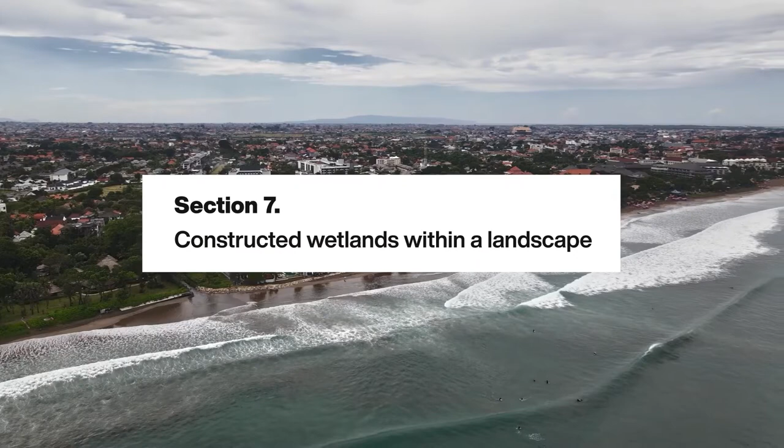So, where did we stop yesterday? Methods of wastewater collection. The first one is conventional, the second is the correct one.

Well done, Betsy. That's the best way to say it. Thank you, Professor. Now please come out to the board and tell me what that means.

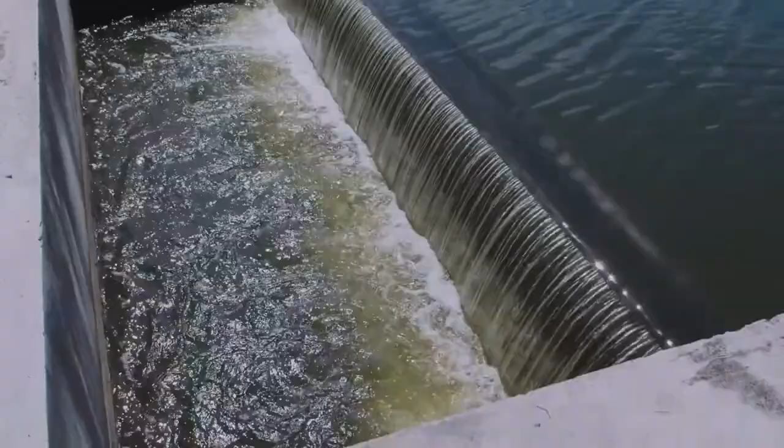With pleasure, Professor Higgins. The conventional method of wastewater collection dates back to ancient times, when wastewater was not cleaned or treated. Wastewater was just discharged and forgotten. This practice is still common today, where wastewater naturally flows downslope, ending up in the first body of water it runs into. It is interesting to note that today the types of wastewater, regardless of their principles of formation, are not the same as they were centuries ago.

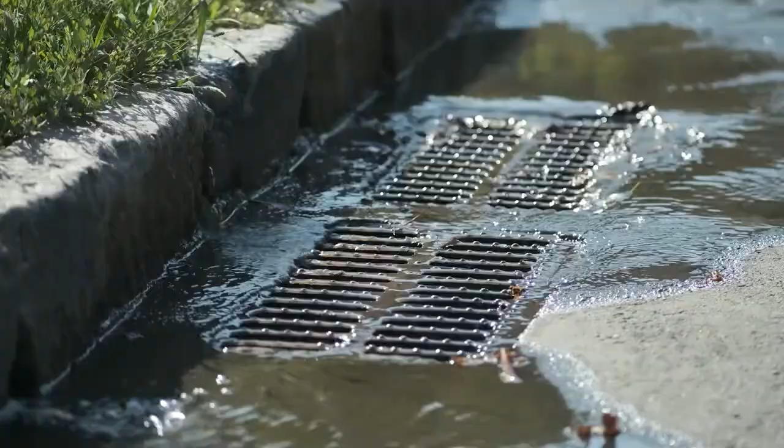Let's describe them. Domestic wastewaters carry everything related to human life: feces, urine, pharmaceuticals, detergents, and other household chemicals. Stormwater runoff results from precipitation that washes man-made pollutants off of roads, urban and industrial areas.

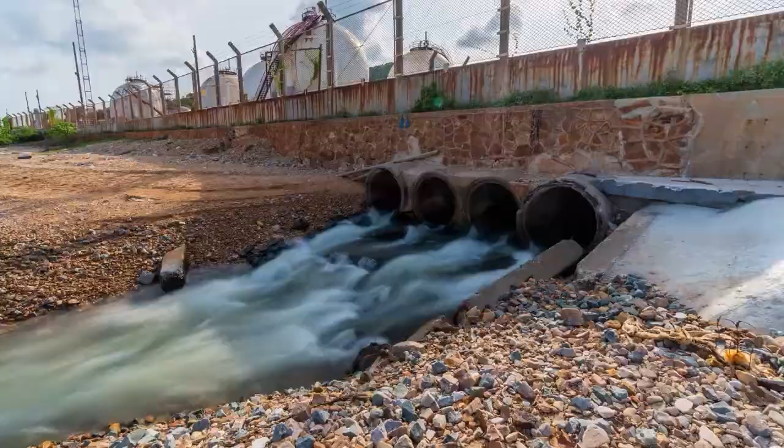There are two types of agricultural wastewaters: wastewater produced by plant cultivation and wastewater generated by livestock production. The first contain organic fertilizers, mineral fertilizers, and crop protection agents. The second contain waste from animal and poultry farms. And finally, industrial wastewaters, which are often the most toxic.

I'd like to reiterate that the conventional method of wastewater collection simply means that wastewater was not collected. Roughly speaking, various wastewaters simply flowed into random points of discharge and bodies of water.

The second principle of wastewater collection includes three technological approaches. The first approach: diffused runoffs are united into one water channel flowing into a particular treatment facility. The second approach: toxic runoffs are united into one channel going into a specialized treatment facility.

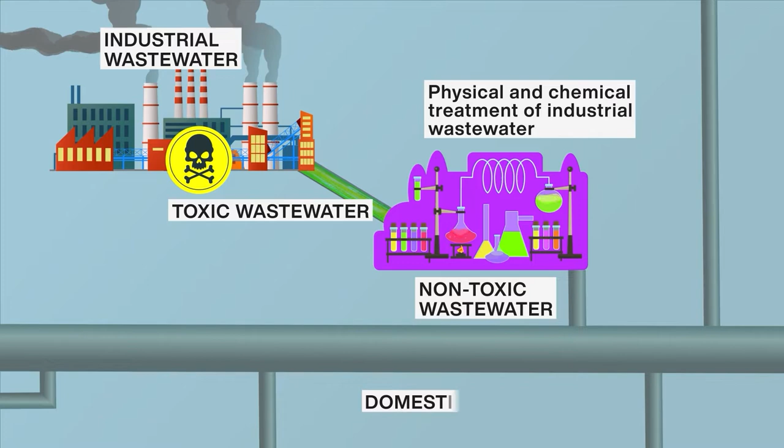The third approach deals with domestic wastewaters. Since they can be slightly polluted or heavily polluted, they require different types of constructed wetlands. Slightly polluted domestic wastewaters are better treated by surface flow wetlands, and heavily polluted domestic wastewaters are treated by subsurface flow wetlands or hybrid wetlands.

All of these methods help to collect wastewater suitable for biological treatment. Thank you, Betsy. You haven't missed anything. Now, may I ask you to solve a problem?

500 tourists, including staff, are staying in a big oceanfront hotel. Every day, 600 cubic meters of the hotel's wastewater is released into the ocean. The hotel is served by a subsurface flow constructed wetland. The constructed wetland has the following parameters.

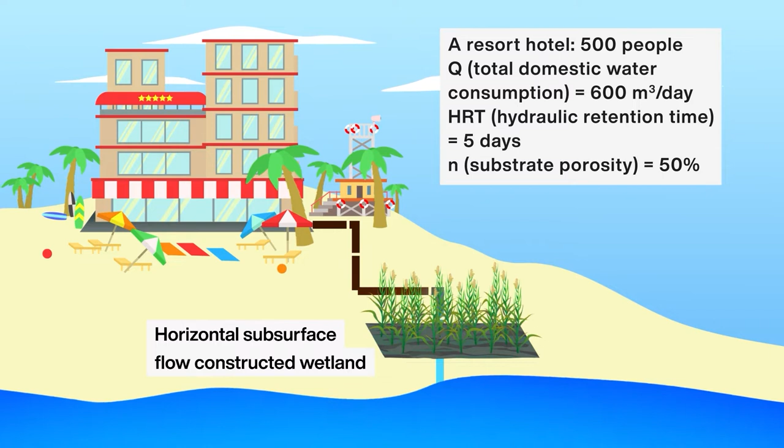Hydraulic retention time is 5 days. The porosity of the substrate is 50%. I'd like you to calculate the working volume of this constructed wetland, necessary for more effective treatment of domestic wastewater that enters the ocean. Is the task clear? Yes, it is. I just need a few minutes.

The working volume of the constructed wetland is calculated using the following formula. Daily water flow rate is multiplied by hydraulic retention time and multiplied by 100%. The obtained product is divided by porosity, expressed as percentage. If I haven't made any mistakes, a volume of 6,000 cubic meters is required for effective treatment of this domestic wastewater.

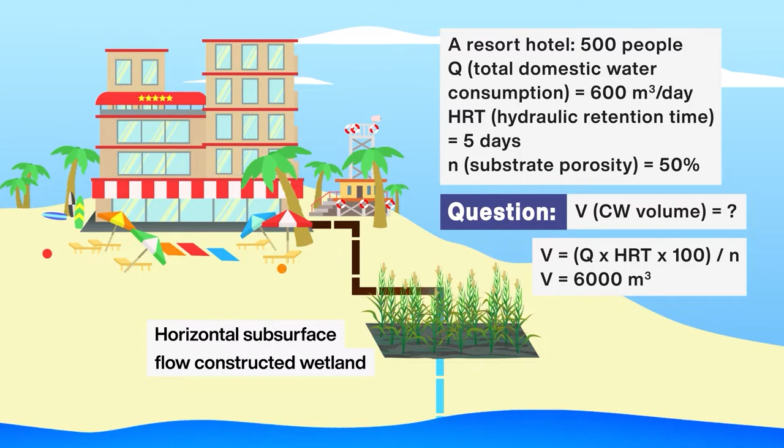Your calculations are correct, Ms. Doolittle. However, I set a trap that you have fallen into. If you have divided the overall water flow rate, 600 cubic meters per day, by the number of tourists, 500 people, you would obtain that each tourist spent about 1,200 liters per day. That is more than 4 times as much as the standard consumption rate in developed countries.

Thus, it's apparent for us that the influent is highly diluted. Maybe because of irrigation runoffs, or water from swimming pools, or both. Anyway, the optimal working volume of the wetland for this particular hotel compared to your calculations should be? It should be 4 times smaller than my result. That's not 6,000 cubic meters, but just about 1,500 cubic meters.

How stupid of me. You shouldn't criticize yourself, Miss Doolittle. Let's get into our subject. Okay, Betsy, why did we choose this name for the subject?

Constructed wetland within a landscape. What do we want to point out by choosing these words? Firstly, wetland construction and design is always part of a landscape. Secondly, constructed wetlands ensure a smooth transition from an artificial landscape to a natural one. And thirdly, unlike activated sludge systems, constructed wetlands do not require a sanitary protection zone, which separates them from residential areas.

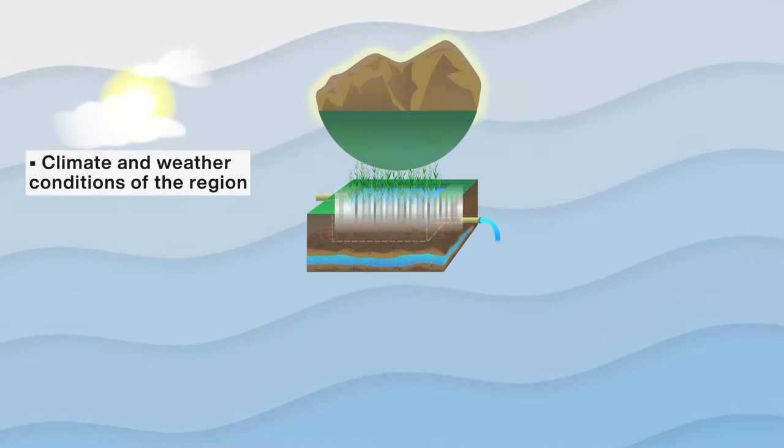To design a constructed wetland, technical engineers take the following factors into account: the climate and weather conditions of the region, the topography, the depth of the water table, the location of man-made objects nearby, the number of residents determining the wastewater volume, and the hydroecological characteristics of the receiving body of water.

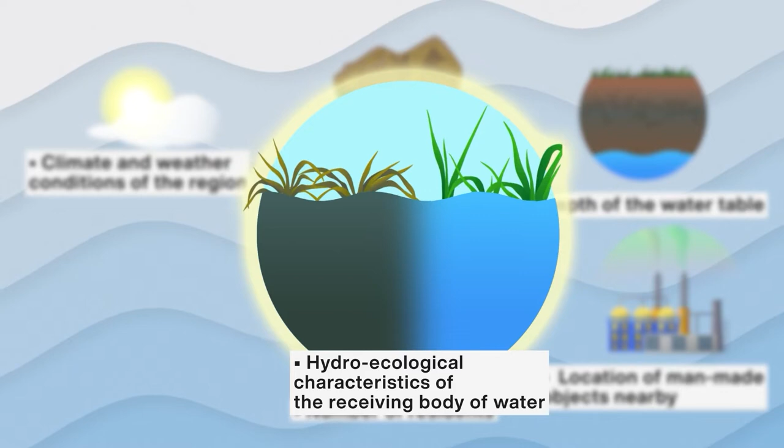Nowadays, there are many engineering solutions to each of the above-mentioned factors. Let me give some examples. Seasonal and weather factors involve, firstly, the planning of emergency spillways for excess water during heavy rainfall. Secondly, some protection to reduce evaporation from constructed wetland during dry season.

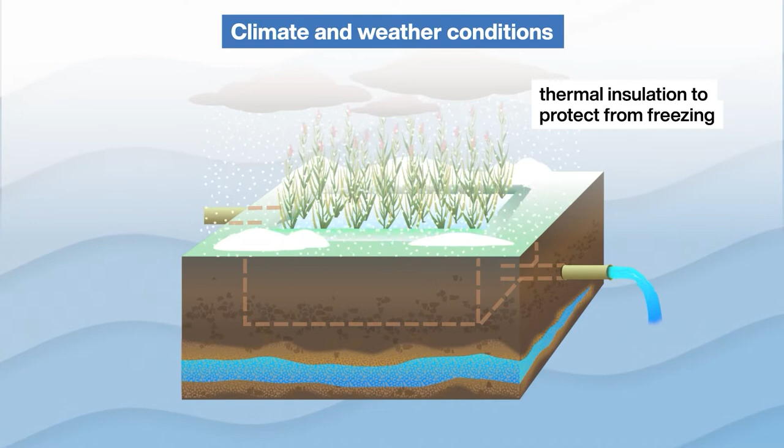And third, thermal insulation to protect the constructed wetland from freezing in case of a sudden drop in air temperature. The design of constructed wetlands requires considering the topography to ensure a downward flow for both influent and effluent, in order to move water downhill.

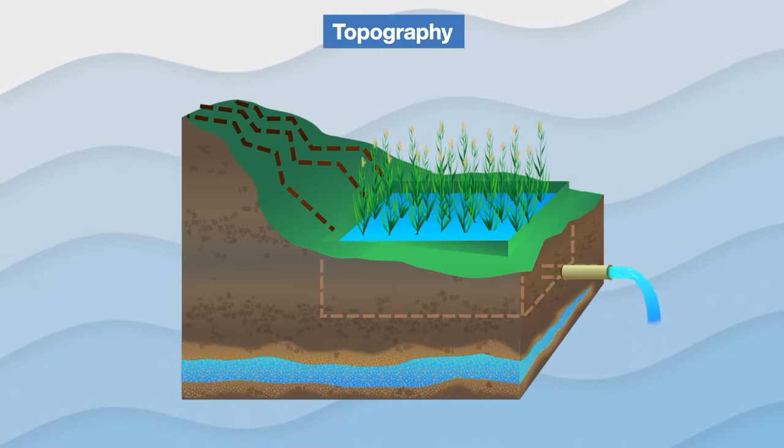Betsy, why downhill? So as to avoid using pumps. Pumps would considerably increase the cost of constructed wetland operation and maintenance.

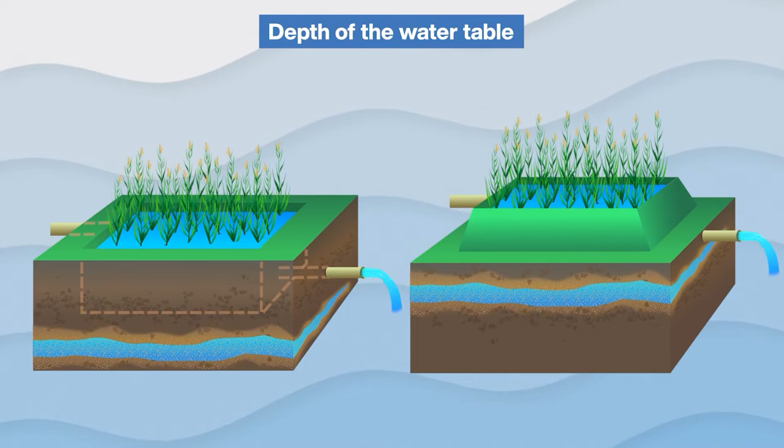Exactly. The decision to build the constructed wetland below or above ground surface depends on the depth of the water table. If the water table is at sufficient, precisely calculated depth, the constructed wetland is built below ground surface. And vice versa, if ground waters are too high, a wetland should be located above the surface.

Thank you, Ms. Doolittle. Man-made structures built into the landscape, like what structures, Betsy? Motorways, or, for example, solid waste landfills.

Absolutely right. Stormwater runoff flowing down the motorways requires immediate treatment. That's why a very long wetland, often many kilometers long, is sometimes constructed on either side of a busy road. These constructed wetlands effectively treat stormwater runoff to prevent pollution of the nearby landscape.

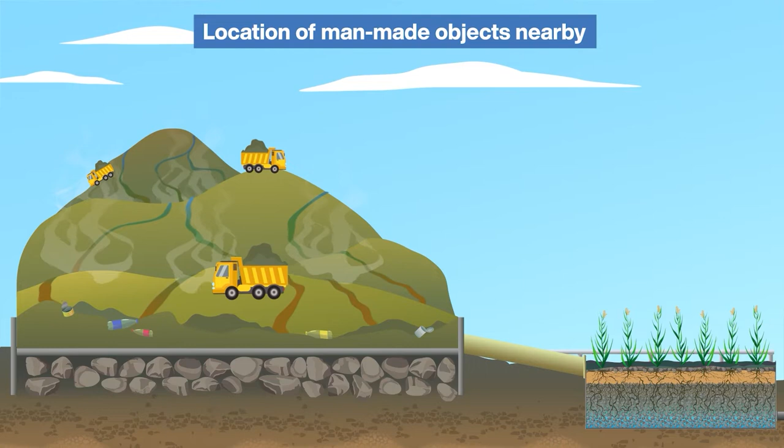Solid waste landfills are exposed to heavy rainfall. In this case, a constructed wetland surface should be located below the waterproof bottom lining of the landfill. Betsy, why do we need a waterproof bottom lining? And why does a wetland surface have to be below it?

When rainwater percolates the layers of waste, the outflow is a toxic mixture. A waterproof bottom lining is crucial to prevent the infiltration of this toxic mixture into groundwater. And if the wetland is placed below the surface of the waterproof bottom lining, the landfill runoffs inevitably get into the wetland. Okay, let's carry on.

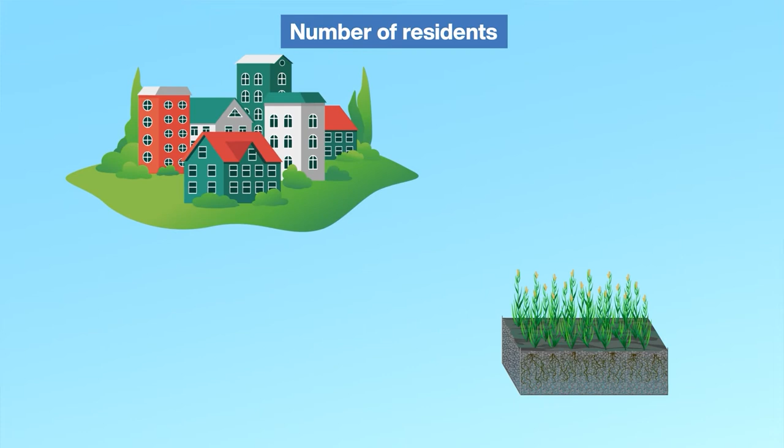The volume of domestic wastewater in this area depends on the number of its residents. And, as we have already discussed, this determines the working volume of the constructed wetlands suitable for this landscape.

And then, lastly, self-purification of the receiving bodies of water - lakes, ponds, rivers - takes a short time only if we, wastewater treatment specialists, strictly follow certain hydrological, hydrochemical and hydrobiological conditions. Project engineers consider most of these conditions when constructing a wetland.

Ms. Doolittle, thank you once again for your clear-cut answers and comments. I have no more questions.

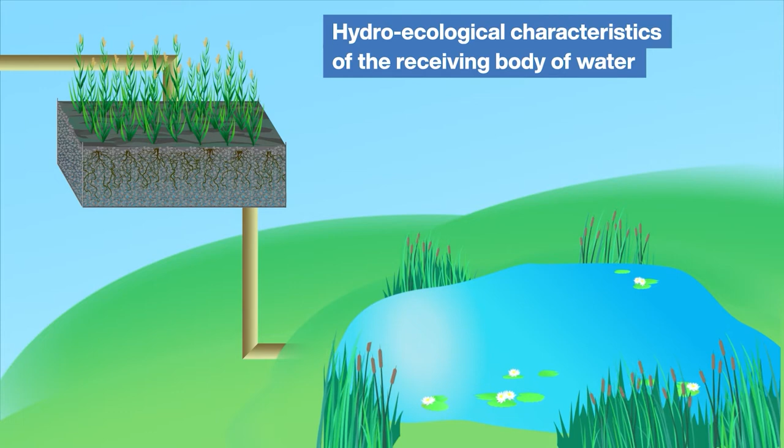Professor, but may I ask you a question? Of course. Sir, could you give some examples of when effluents increase the biodiversity of a receiving body of water and improve its hydroecological parameters at the same time?

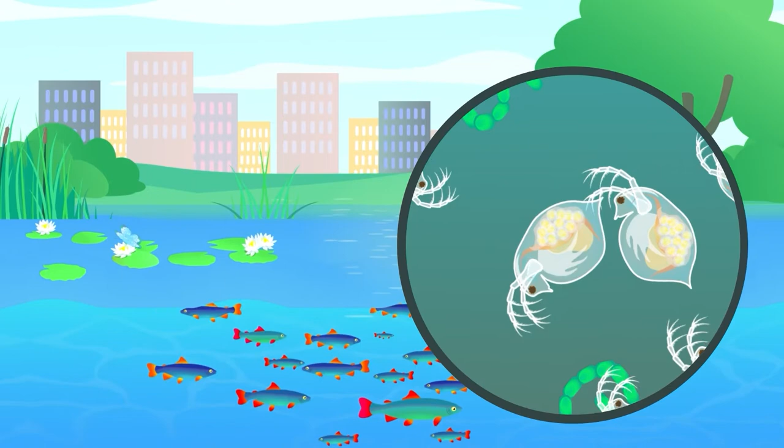There are many such examples, but now I will give you only one. The building of two integrated constructed wetlands at Xinhai and Danniaopi in Taiwan allowed for a considerable increase in biodiversity in the area. The number of bird, fish, and aquatic invertebrate species increased more than twofold. The landscape around these wetlands is now difficult to distinguish from a natural one.

That's amazing. I agree. What's also amazing is how different constructed wetlands are from activated sludge systems. I will reiterate that the cement facilities of an activated sludge system also need continuous regulation.

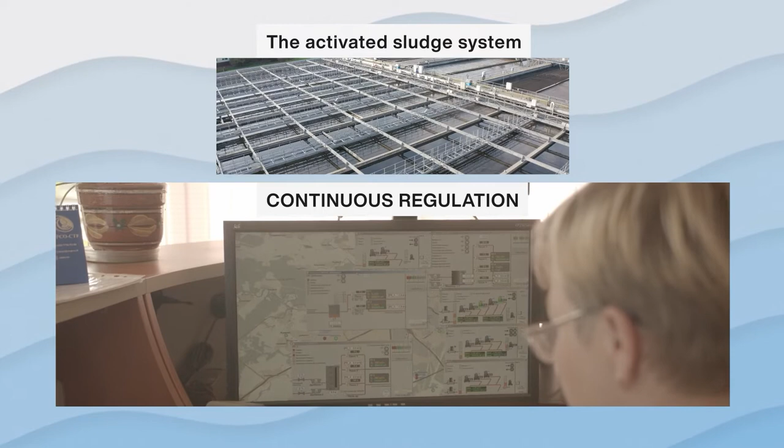24 hours a day, operators regulate the processes in the aeration tanks. Engineers must constantly monitor the air blowers and mixers. Special technical services continuously oversee the recycling of the excess activated sludge, etc., etc.

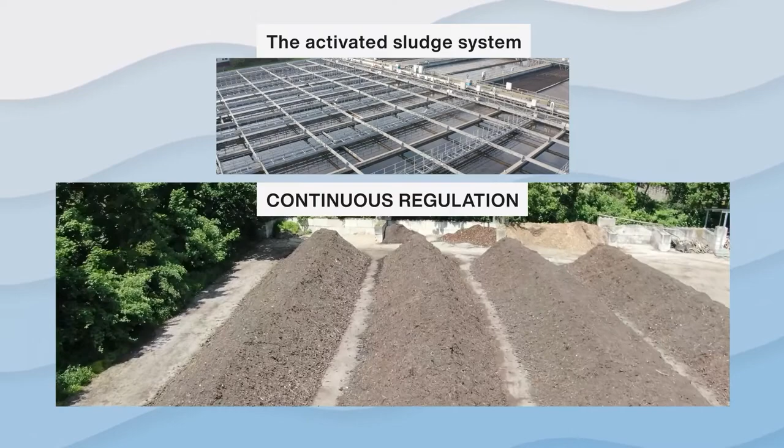A constructed wetland, by contrast, is self-regulated. It's amazing how a constructed wetland is in itself a small ecosystem, which incorporates into the ecosystem of a particular area and supports its homeostasis.

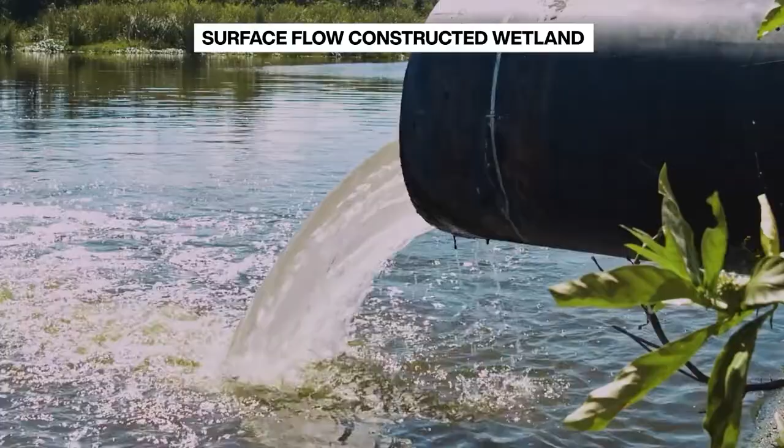For example, by discharging into a pond or lake, a constructed wetland can considerably contribute to plankton growth, which creates perfect conditions for populating the water body with fish. In addition, a carefully landscaped wetland is a comfortable habitat for aquatic and terrestrial animals, as well as many bird species, including migratory ones.

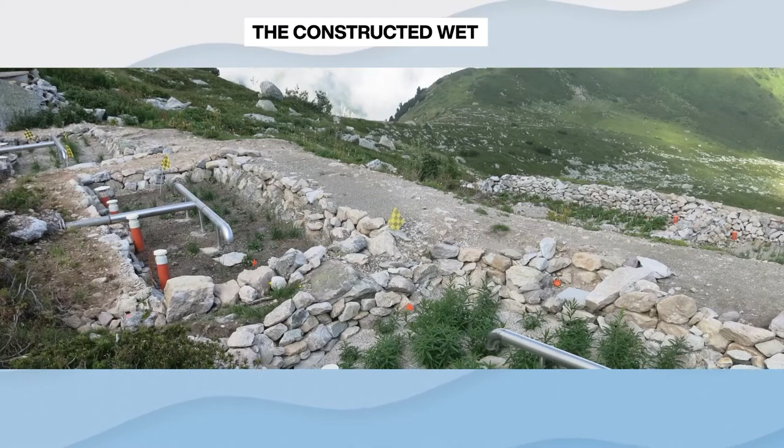On top of that, treated effluents can provide fast-growing trees with nutrients, as they consume far more nutrients than ordinary trees. All in all, it's hard to exaggerate the benefits of a constructed wetland as a treatment facility.

What's also important for us as wastewater treatment specialists is that constructed wetlands are usually very beautiful. They are visually attractive and make you feel as if you are walking in a park.

That's true, Miss Doolittle. Speaking of which, let's compare two quantitative indicators. A farmland of 1,800 square meters is required to feed one human resident of our planet on a daily basis, according to the Food and Agriculture Organization of the United Nations. This is the first indicator.

The second indicator is for you to calculate: what surface area of constructed wetland is needed to treat domestic wastewater generated by one Earth resident? Using which type of a constructed wetland? A horizontal subsurface flow constructed wetland.

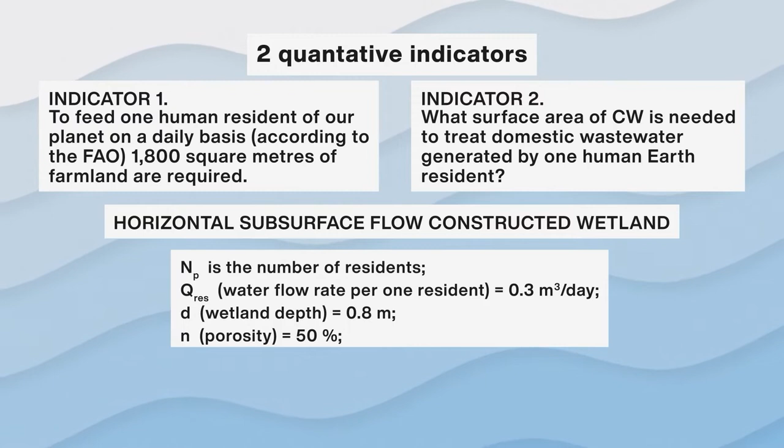Could you please write the following on the board? The number of residents whose domestic wastewater enters the constructed wetland equals Np. Water flow rate per one resident is 0.3 cubic meters per day. The constructed wetland's depth is 0.8 meters. Substrate porosity is 50%. Hydraulic retention time is 7 days.

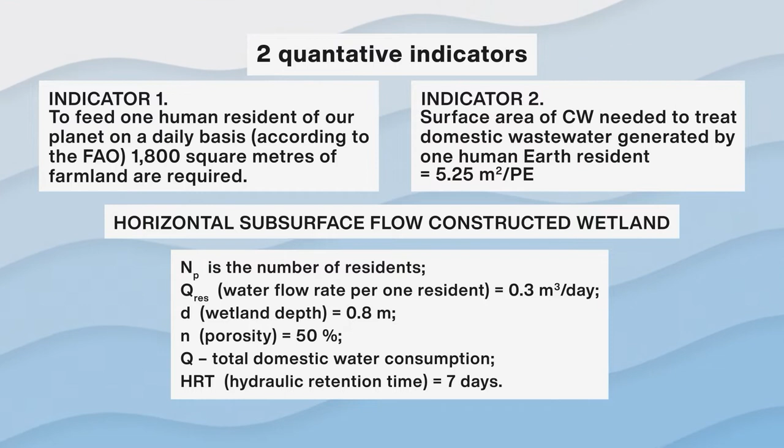Please calculate the surface area of the constructed wetland which can treat domestic wastewater produced by one person. Is the task clear? Yes, one moment, I'm making calculations. I have the answer. It's 5.25 square meters.

I've never given much thought to how much more difficult it's to feed a human rather than to treat their personal domestic waste. Yes, but only if it deals with domestic wastewater, putting aside industrial and other types of pollutants.

Now I think it's time to discuss the most important feature of treatment wetlands. Please write on the board: technical and natural components in wetlands construction.

Professor, here we have to consider how important the work done by engineers is, and the contribution of biologists in wetland construction. What's the role of engineers?

Yes, it's an interesting topic. Engineers calculate a wetland's volume, choose the appropriate materials, and build the skeleton of a wetland. Excellent, Miss Doolittle. Let's do this.

You'll tell me everything, but tomorrow. For now, I have to run. See you.